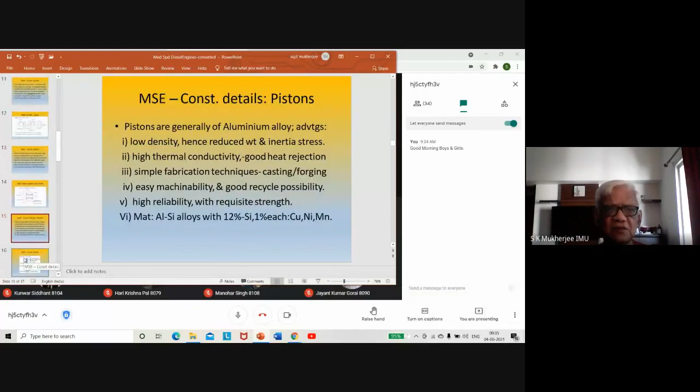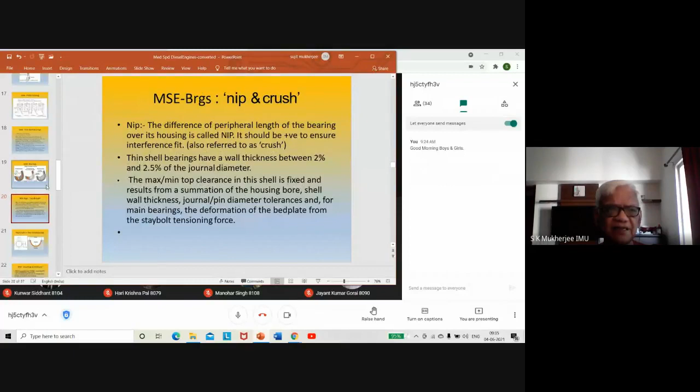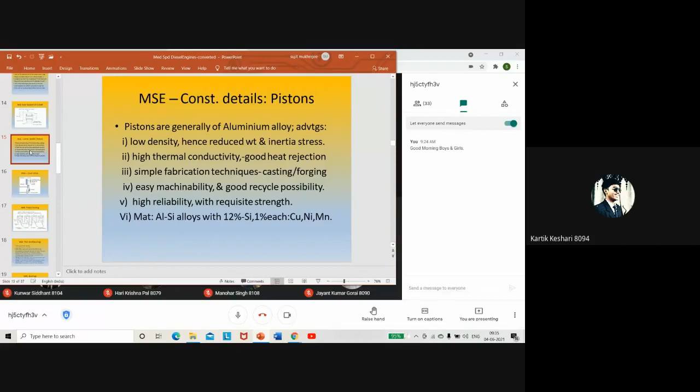The medium speed engines, which part? Advantages were done last, sir. Okay, advantages. And in systems, there's advantages, constructional details. Thin shell bearings - have we done that? No sir. Pistons, we have done pistons, so it was much before. Advantages, yes, here you are. You're doing advantages. Okay, we are going to go pretty fast in this. Okay, desirable features - you have seen there are 9 desirable features, and thereafter we started on medium speed engine advantages.

Somebody has come to class - Ketan Kumar Sinha. This is a bit of a disturbance, 33 only. Indrajit Mitra, okay, no more, we are not admitting anymore. Fellows come late to class and you keep reading, and I keep admitting, and you keep coming later and later in the same sequence. Mrityunjay Das, okay this will be the last, no more.

So we have 34 boys, and this is section C. Paran Abdus, are you there? Kundan Kumar, are you there? Not there, neither of the class in-charges are there. Okay Karthik, you take charge, and I need to know the absentees at the end of the class.

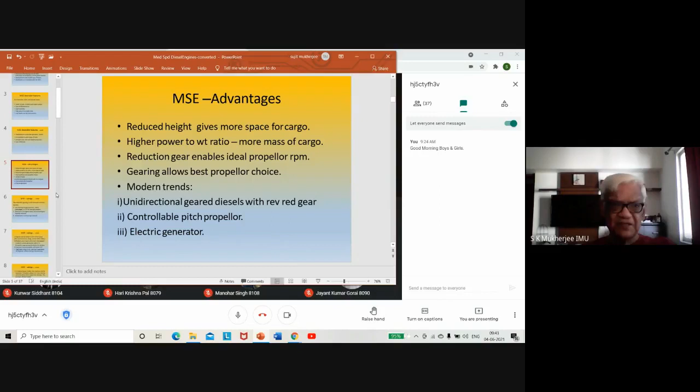So these are really diesel electric ships, and we don't see them much on cargo vessels that we serve on. They will be mainly on passenger ships or naval ships. More common are the geared diesels, with reverse reduction gearing and controllable pitch propeller being most common.

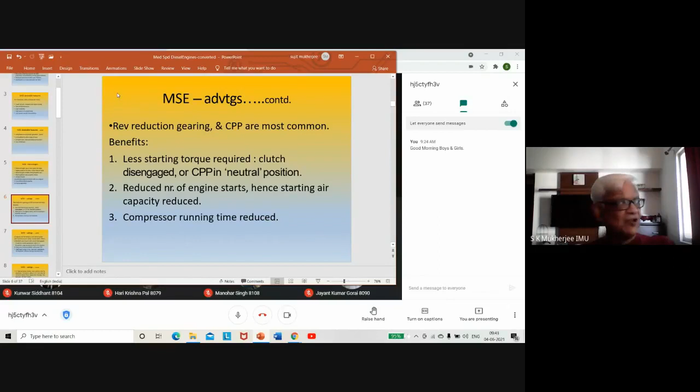Some of them carry reefer cargo. Reefer cargo ships are also very highly stressed ships. Reefer cargo ships and product carriers commonly use controllable pitch propellers.

Okay, what are the benefits of having medium speed engines as your propulsion units? One is less starting torque required, since the clutch is disengaged, or the CPP is in neutral position.

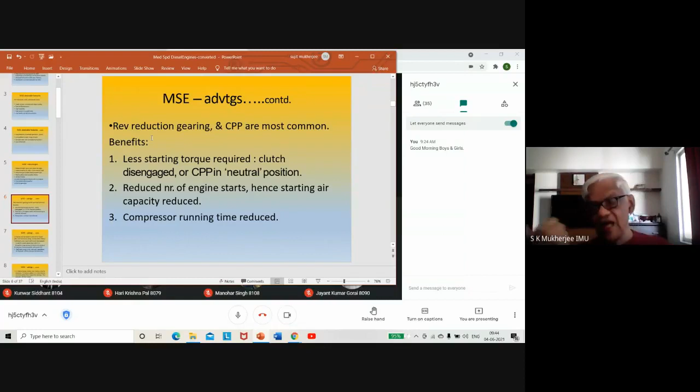Now when you start the engine, let's consider a two-stroke engine that is directly coupled to the propeller. So when you want to start the engine, you have to overcome the resistance of the engine itself, and also the resistance of the propeller. So the quantity and pressure of air required to push the piston down will be much more. Now in the medium speed engine, you have a clutch mechanism, so all you need to do is declutch the propeller and your engine is free. You need very little air to give a little push on the piston, and the engine starts rotating.

It helps to start the engine with a minuscule quantity of air. So you don't need very large air bottles, and you don't need high capacity compressors. So you save a lot of money in that. That is why a medium speed engine has been found to be more advantageous.

Other than this, in the case of a controllable pitch propeller, you can put the propeller in neutral pitch, and then there is no resistance to the engine where the propeller is concerned. So it is very easy to start that engine.

In fact, I will tell you an experience. We had a two-stroke large bore engine, and anytime the rudder was hard on port, we could not start the engine. No matter how much air you give, you cannot. Moment that rudder was put to hard on port, we give air, it will run and then stop. It wouldn't pick up the momentum.

Then we realized on the rudder angle indicator that the rudder is on hard on port. So we used to ring up the bridge and tell them, put the rudder on midship. So they used to put it on midship, and then the engine used to run. Why? Because when the propeller was turning, it was getting a lot of resistance, not being allowed to throw the water beyond the rudder, because the rudder was acting almost like a wall. So the propeller was pushing water against it, and in turn the rudder and propeller were under a lot of resistance.

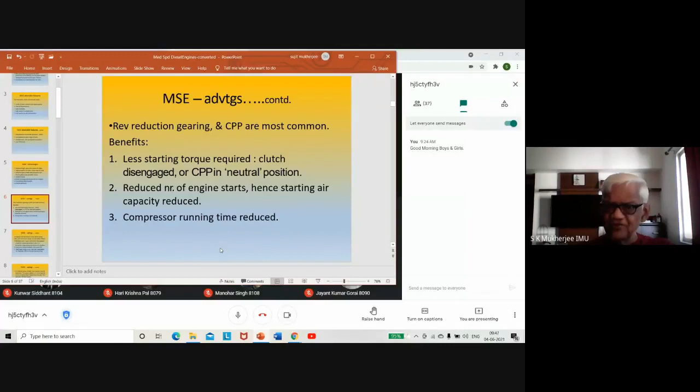The engines can be tested in port at full speed. Once you declutch the engine, you can run the engine at full speed. This is of enormous advantage as trials after overhaul, because after you decarbonize a unit, you have changed, let us say, a piston or piston rings or a bearing, and then you put the parts back, and you're not sure if the engine is going to run satisfactorily or not. And you can't afford to try it out because the engine is directly coupled to the propeller.

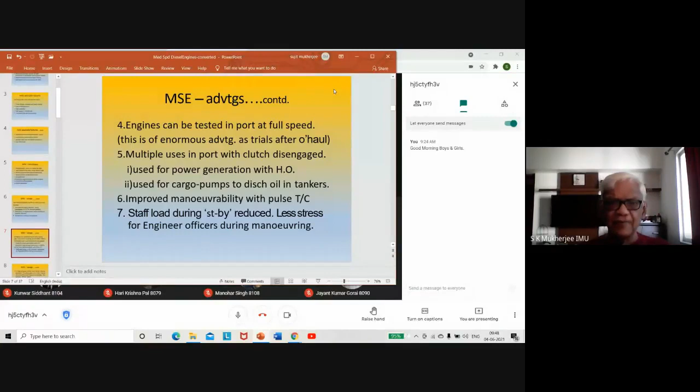If you start the engine and run it, the whole ship will take off and will tear the mooring ropes also. So you cannot try out the engines in the case of a large bore two-stroke engine having direct propeller drive. But in the case of a medium speed engine, you have the option of disengaging the clutch and running the engine at full speed. You can run it for 1 hour, 2 hours, 3 hours, no problem. Then you check around that engine whether everything is satisfactory after your overhaul.

Once it is certified that it is perfectly satisfactory, you can shut it off and relax, because when the ship is required to go out of the harbor, you know fully well that your engine is fully ready, no problems. That is a very big advantage. Otherwise, if you've done everything and then when it's time to depart from a harbor, you start the engine and the liner starts leaking, or the fuel oil pipe starts leaking, or something is making a noise which has not been tightened properly. These problems come up very often after overhauling an engine. So you need to try out the engine, and this is possible only in the case of a medium speed engine which has a clutch arrangement.

I hope you follow the understanding of what I'm saying.

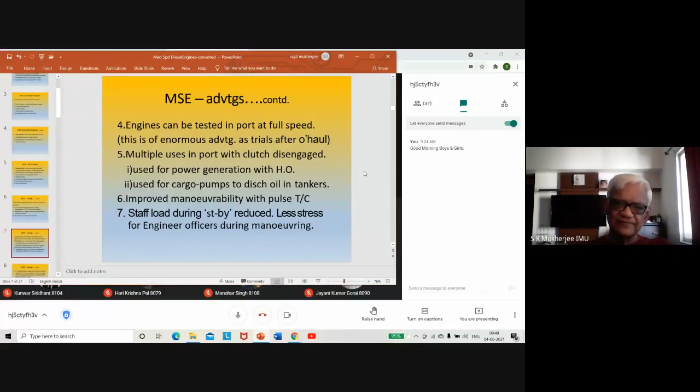Himanish Mukherjee, are you awake now? Still not awake. Himanish Mukherjee, where is he? He's there only on paper.

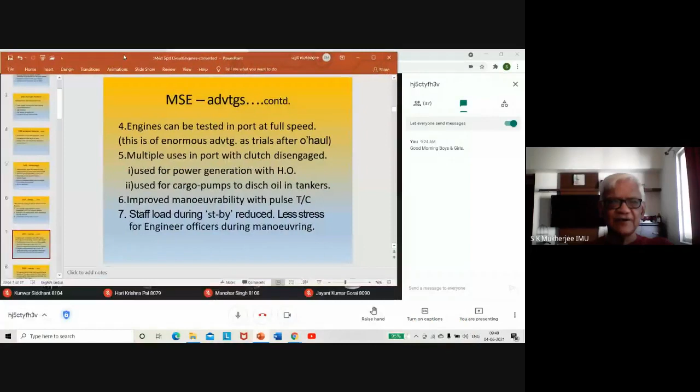Yes sir, what's happened, your microphone is not working. I can't hear you, I can only read the message you're giving. I can hear Karthik, I can hear Manohar Singh, but Himanish Mukherjee has microphone issues. Okay never mind, stay awake, that's the important part.

So you realize how important it is to try out an engine after you've done the overhaul, and this is possible with medium speed engines with the clutch disengaged.

Apart from this, you have multiple uses in port with the clutch disengaged. That means the ship owner has paid a lot of money to buy a main engine. If that is used only for transporting the ship, once it reaches port it sits idle, not giving returns on investment. So this medium speed engine can be used for multiple occasions when the clutch is disengaged, meaning the propeller is not engaged with the engine.

So what uses can it have? It is used for power generation with heavy oil, which is cheaper than diesel oil. So instead of having 3 auxiliary engines burning distillate fuel, you have only 2.

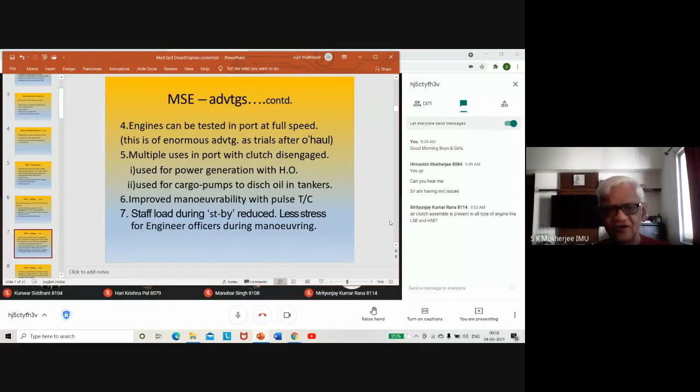Yes, sir. Mrityunjay? Yes, sir. Okay, be very clear - these are the places you will get caught during your interviews with shipping companies. They will ask you, medium speed engine, do you know what is a medium speed engine? How is it used on board the ship? You tell them a medium speed engine will have a clutch if it is used for propulsion, but it will have no clutch if it is used for electricity generation, because you don't have any resistance at the time of starting. You can run it idle, you don't need to put the alternator on load, and then you can check the engine is all right or not. There's no problem. But for the main engine, the clutch will be there, with the ability to disconnect and connect.

For a two-stroke large bore engine, there is no clutch, it is directly driving the propeller. So staff load during standby is reduced - that means you don't need extra engineers when you're using a medium speed engine, because your engine is continuously running. You don't need extra people to look after the compressor, and you don't need extra people to look at other parts of the engine also.

Good that you ask questions, Mrityunjay. If you have any more questions, definitely you must ask. But keep your concepts absolutely clear.

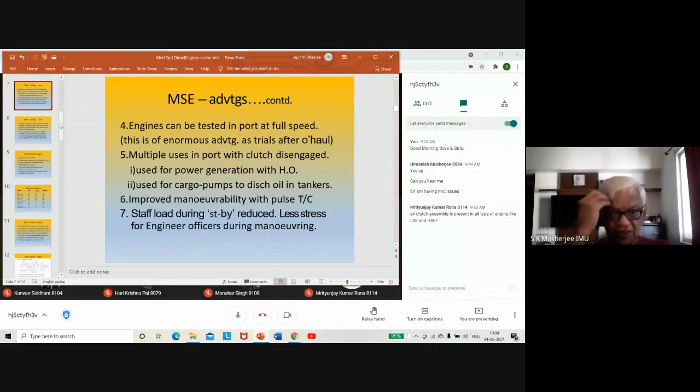Engines being smaller, two engines may be deployed. This gives safety in numbers. One may be serviced while the other keeps the ship moving. This reduces off-hire losses.

Now, all this time we were talking about comparison of engines. A two-stroke engine is a big, tall, huge engine. A medium speed engine can be very small, but give much more power to weight ratio. So if you're going to use a small engine, why not use two engines? Because the space is available.

If you have two engines, the advantage is that if at sea a breakdown takes place which you are unable to repair, you still have a second engine which can keep the ship moving and bring it to shore, albeit at reduced speed, but it will not be stranded out at sea. If you have a single engine and something breaks very severely, which the ship's engineers cannot repair, that ship has to be towed. And if it has to be towed from the middle of the Atlantic to shore, you might as well sell the ship.

The cost of towing the ship will be more than the ship. That is the way it is. The moment you're in trouble, there are people who are out to extract the benefit out of you. First, they will squeeze you. They will want their pound of flesh. This is the case in all parts of the world. So do not be in trouble on board the ship. If you're in trouble, people will help you, but at a very, very high cost.

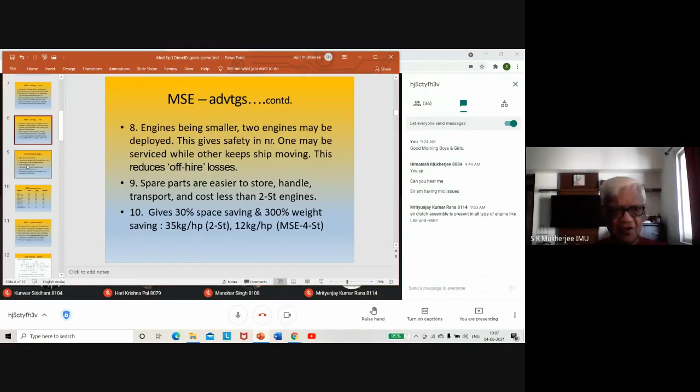You have to take the good and the bad together. So first one is high lube oil consumption. Lubricating oil is the costliest oil on board the ship, so it is a perennial expenditure for the ship owner, an increased perennial expense. So his bottom line margin will decrease gradually.

What is the consumption? Usually 1.2 grams per brake horsepower per hour in the case of your four-stroke engine, as against 0.7 grams per brake horsepower per hour in two-stroke engines. The more modern two-stroke engines will have 0.5 grams per brake horsepower per hour, less than half of what a four-stroke engine consumes.

Why is the lube oil consumption so high? Well, one thing is, after a stipulated running period, the oil in the medium speed or four-stroke engine has to be changed, there's no choice. Why? Because the crankcase space is open to the piston blow-past possibility, so the oil is bound to get contaminated over a period of time.

In the case of a two-stroke engine, you have a diaphragm and a piston rod stuffing box. This prevents any blow-past reaching your crankcase, so the oil is very well protected and it remains very clean.

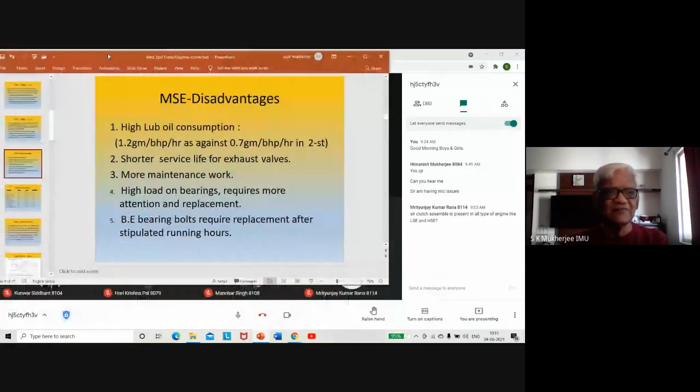Yes, sir. Okay, good. Who else is there in the class? I only keep calling Karthik. Okay, Manohar Singh, Hari Krishna Pal. But most of the guys are sleeping. If I call, there is no response. That's the very sad part. Okay, I'll call any one of you just after this.

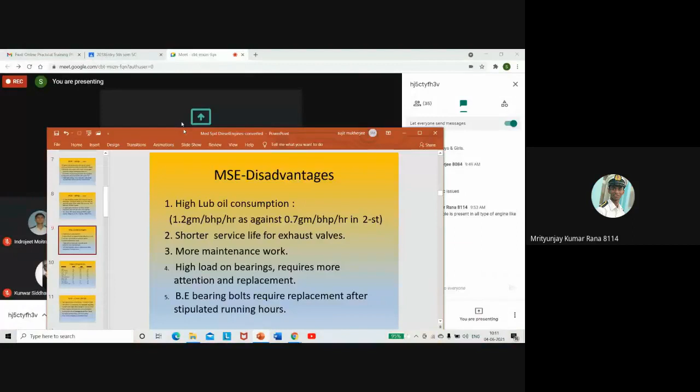Next question. Hello, sir. Yeah, what is it? Sir, in case of two-stroke engine, the purifier is not removing the acidity of the oil. In case of two-stroke engine, it's rankling.

The sound is rankling. Let me reduce the volume. I can hear it is very loud, but it is rankling in my ears. Oh my God! Where is the sound? Just a minute, please. Oh, it is very high. Okay. Yeah, Mrityunjay, repeat your question once more, please.

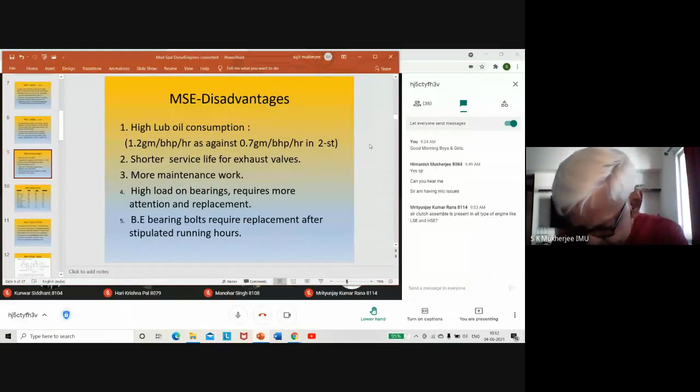Sir, in case of purifier of a main engine, it is not removing the acidic part of the oil.

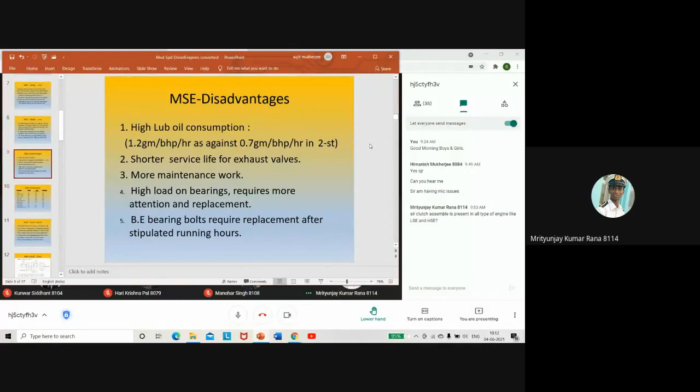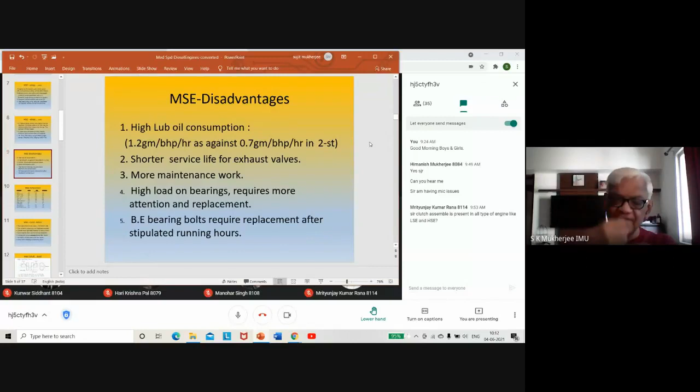Where is the acidic part coming from in the crankcase oil of a two-stroke engine? There is no blow-by coming into the crankcase. You have a diaphragm, and that diaphragm and the stuffing box prevent any blow-by gases. The blow-by gases are the ones that have the sulfur dioxide. That sulfur dioxide gas is not allowed to come into the crankcase. So where is the acid? There is no acid coming in.

Yes, sorry sir. Okay, that is good. Never mind, get your ideas clear. Good that you asked and got it cleared.

In the four-stroke engine, the blow-by goes directly into the crankcase, so the oil gets contaminated not only with combustion debris. Combustion debris means ash, oxide, catfines, oxides of catfine, carbon, sulfur dioxide, sulfur trioxide, acids - everything is blown into the crankcase. So four-stroke engine oil has to be changed after a stipulated running time.

Same with your motorbikes - you must be riding motorbikes and all these. Most bikes are now four-stroke. Previously we had two-stroke and four-stroke, so the two-stroke bikes were comfortable - they never used to change the oil. But the four-stroke bikes, after 1500 kilometers of running, you have to drain that oil, put fresh oil, and move on. That is why oil consumption in four-stroke engines is definitely much more.

Now the question to you, Mrityunjay: how is the cylinder lubricated in your motorbikes, both two-stroke and four-stroke? Think it out and keep it with yourself, and we will proceed with the class.

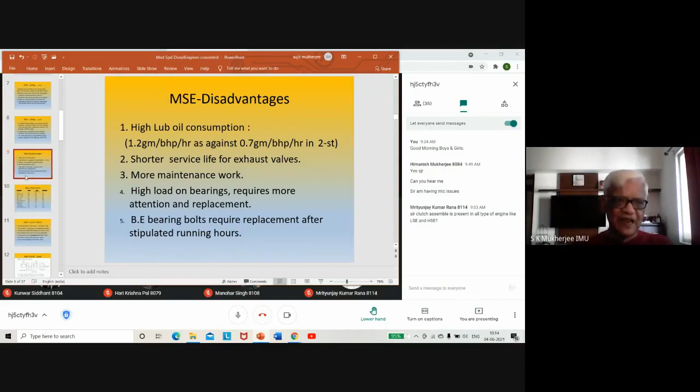Now here I have three different engines, and they are each comparable to each other. I would like you to make a choice which one you would like to install as a medium speed engine for your shipboard. Suppose I give you a ship, a reefer ship, carrying bananas from Kerala to Kolkata - a 5 day trip, not a very big reefer ship, medium sized. Think which particular engine you would require or choose, and what features you would be demanding from such an engine.

So do assignments of similar nature for your own benefit. If you were a ship owner, think like that - between the three engines, which one will I take, and what all facilities and features it must have to make sure your reefer cargo reaches its destination without any fault. You have to start thinking on those lines - you cannot afford to think as an engine cadet all the time.

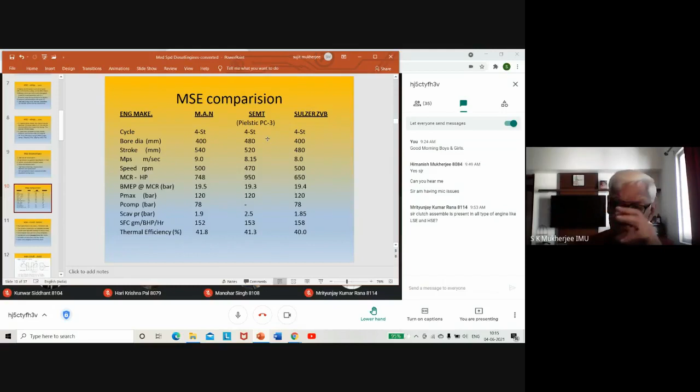Okay, let's go through this one. There are three engines - one is MAN, one is SEMT Pielstick. Pielstick is also a very good engine. It is originally German, but that German company shifted to France during the war and started manufacturing engines in France. SEMT has a certain long name, and the engines they manufacture are Pielstick PC3, PC2, PC1 - that is one company. They are comparable to Sulzer and MAN.

Now here Sulzer has given its medium speed engine, MAN has given its medium speed engine, so you choose between the three which engine will be to your maximum benefit, and accordingly. All the parameters are given, including mean piston speed, compression pressure, specific fuel consumption, thermal efficiency, all of it. This is an indication of how difficult it is for a ship owner to pick and choose a particular engine.

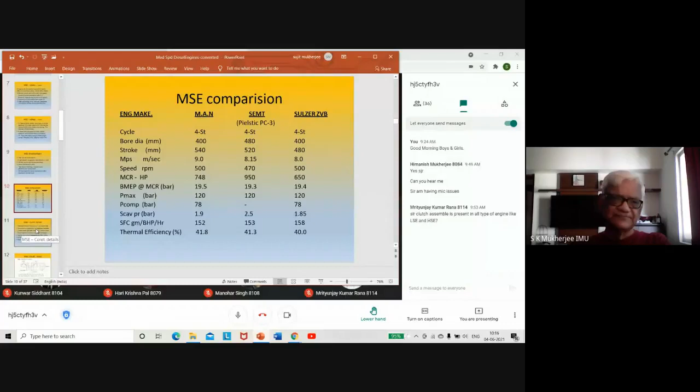Now, let us go through the constructional details of an engine. The engine block is one piece, a completely cast unit, one block. And on that block, all the fittings are put on.

The crankshaft is underslung, which means there is no bed plate required. On the underside of the block, you have keeps similar to your bottom end bearing lower keep. That keep is fitted against the underside of the engine, and the whole crankshaft is hung. Hung means underslung, and when the load comes, it comes on those keeps, and it is capable of taking the load, and it does not have any bed plate.

So what about the sump? Now the sump is basically a mild steel plate which is bent and shaped in the form of a sump, and it is welded onto the block. So it forms your sump. Of course, there will be a drain passage also, and it will have the required pump suction run by the engine, etc.

So these modern engines are monoblock engines. Apart from this, the crankshaft is made rigid with overlap to reduce stress. A crankshaft, if it is a straight shaft, is very rigid. But if it is made with crank throws, it becomes weaker where torsion or bending is concerned.

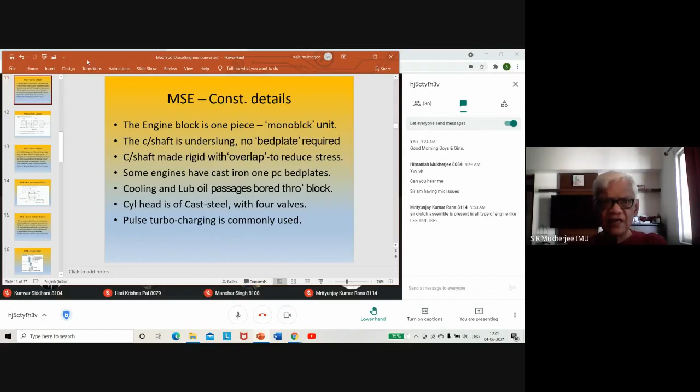Cylinder head is cast steel with four valves. Now, four valves, that means how many inlet, how many outlet? There will be two inlet and two outlet valves. Now, Indrojeet Moitra, I have a question for you. Why will an engine have four valves when two valves are quite satisfactory, one inlet valve and one outlet valve? Why will you have four valves, two inlet and two exhaust?

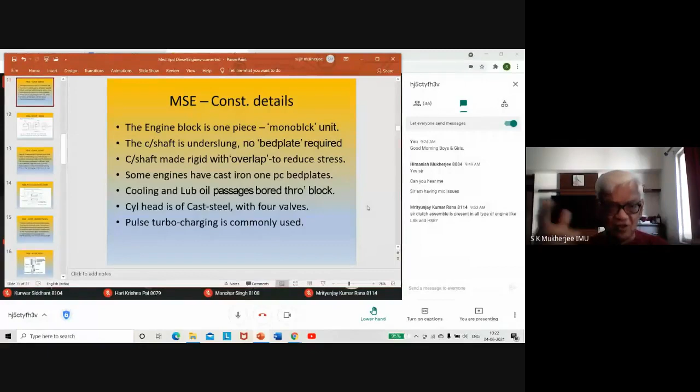Moitra... Yes, sir. Why? Answer my question.

See, you're not paying attention. It's quite evident you're not paying attention. So what we'll do, we'll skip. Manohar Singh. Yes, sir, why will we have four valves instead of two valves? Give your own ideas, don't worry.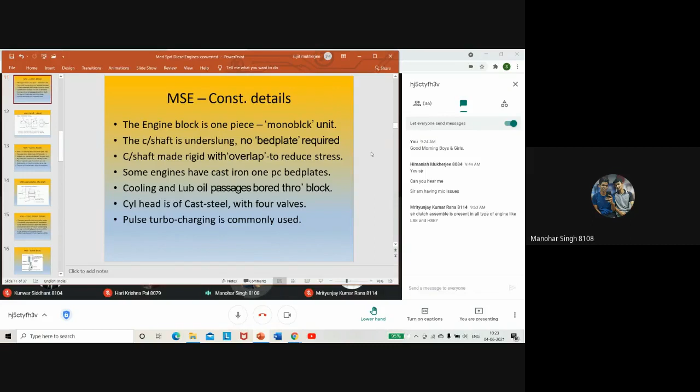Sir, if we use four valves instead of two valves, we can reduce the weight and also increase the efficiency because air intake will be more, breathing will be more for the engine. Absolutely right, that's a very good answer. The breathing characteristics of the engine will improve if you have a larger opening for gas transmission. That means air comes in quickly, fills up enough, and goes out quickly too. So how well you breathe will decide how well you can run a 100 meters dash, and how poorly you breathe will also indicate how poorly you run the dash. Correct? That's right, Manohar. Okay, let's move on.

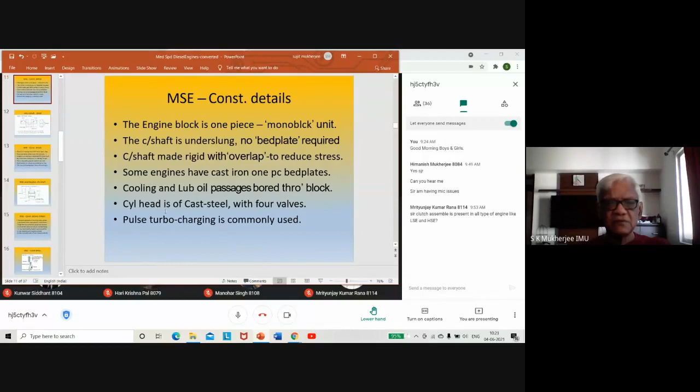Where were we? Cylinder head of cast steel with four valves. Pulse turbocharging is commonly used. Yes, medium speed engines will always have pulse turbocharging. I told you why - they gave immediate acceleration.

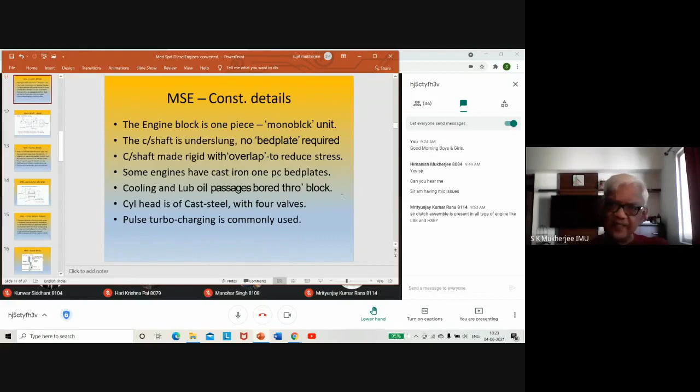Now let's have a look at the crankshaft which we were talking about. Here is the crankshaft of a medium speed engine. In a two-stroke engine, the crank webs will be much longer and the crank pins will be down here somewhere. So the crank throw means the distance from the center point of the journal to the center point of the crank pin. If this distance is large, it means the crank throw is large. Now, in the case of a medium speed engine, the crank throw is made small intentionally to ensure that the crankshaft has some rigidity.

Now if you look at it from the side, you will see the cross section of the crank pin and the cross section of the main journal - sorry, this is the crank pin and this is the main journal. They have a certain overlap. This overlap provides some amount of rigidity to the crankshaft. It is much stronger. There will be no crankweb deflections so easily. So it will stay in a much better shape and have more reliability.

The figure shows drilled bores for lube oil to the connecting rod. The lubricating oil which is fed to the main bearing - this is where the main bearings come in - it is fed in, and the shaft itself has a drilled passage. This drilled passage goes through the crankshaft and comes out from the crank pin. Similarly, a drilled passage from this bearing comes out from the connecting rod bearing. Once it comes out from here, it not only lubricates the bottom end bearing, it allows the oil to go up to the connecting rod and lubricate the gudgeon pin. That gudgeon pin bronze bush also needs lubrication, so it is lubricated there.

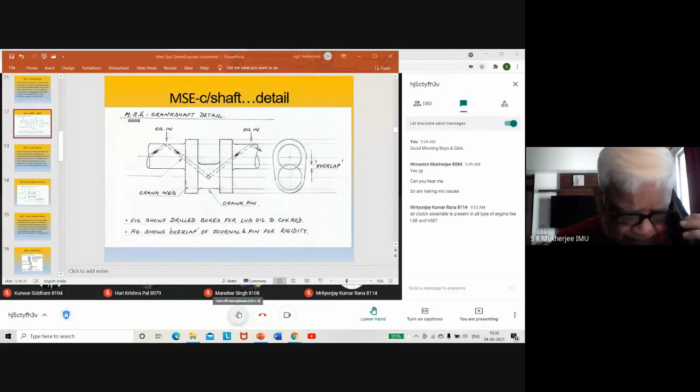Yes, absolutely. Absolutely. Yes, definitely. Okay, okay. Theek hai. Yes, absolutely.

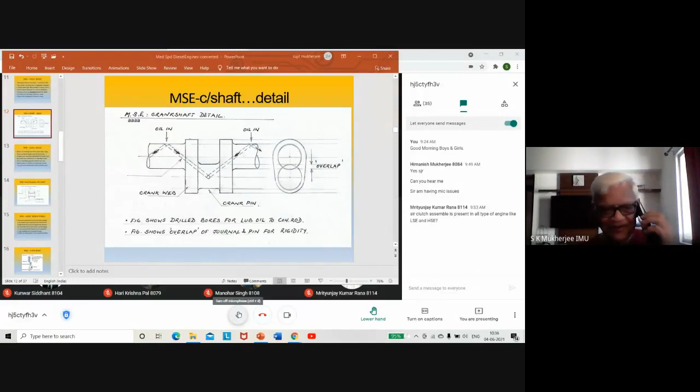See guys, that was from Mr. Abir J from NYK Ship Management, and they are having issues with one boy, Abhay Kumar. They need his tar book, which has to be got from our office and sent to Mumbai by courier. But our office is closed, so nobody is coming to the office until after the 15th, and on the 17th he's supposed to join ship. So the decision is that he can join ship without the tar book, and they'll have to courier it to Singapore, wherever the ship is going. These issues have come up, and we hope there will be no more lockdown after the 15th so we can go to office to perform these actions. I have written to the head of office, but nobody can do anything if it's a lockdown. First priority is fulfilling requirements of the lockdown. Everybody is in trouble, what to do?

Okay, let's get back to our subject. So this is your crankshaft. Sir, how is the lube oil supplied to the bore of the rotating crankshaft?

Good question. The lubricating oil comes from the sump. The pump takes the oil from the sump and it passes through a common manifold. From this manifold pipe, individual pipes come out from each unit, and these pipes are ultimately fitted on the main bearing cap, so the main bearing gets the oil first.

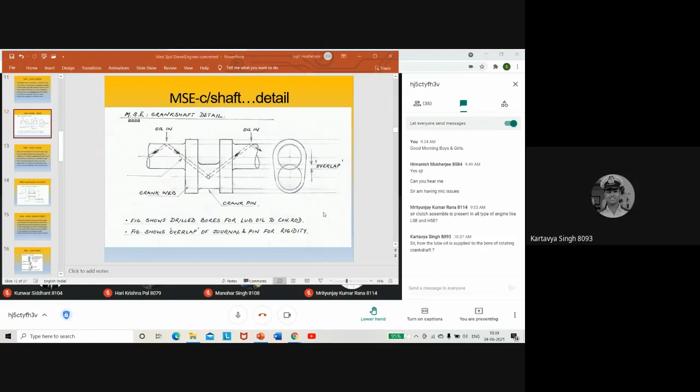Okay. So Kartavya Singh - yes sir - it comes from the main manifold, and that manifold is pumped with oil by the engine-driven pump in the case of a medium-speed engine. That oil comes from the manifold in separate pipes to each of the main bearing units. This is one unit, this is another unit, similarly every unit will have a main bearing.

The crankshaft has several main bearings, so the oil comes to the main bearing, goes into it, and lubricates it. The excess oil further moves through the bore of the journal - this is the bore, the hole in the journal - allowing oil to pass through and come to the crank pin bearing. From here it lubricates the crank pin bearing and further moves up through the connecting rod to the gudgeon pin bearing.

Have you understood? Yes, sir. Okay, let's move on. This is the one, next is this. Okay, now.

Further, we are going to discuss the bearings of the crankshaft, specifically the modern bearings. I am leaving out the old casting bearings that were used earlier - they are of no consequence now and you are unlikely to see them on board.

So the thin shell bearing is the more common type used for your main bearing. It is used for your bottom end bearing, and also for your crosshead bearings in two-stroke engines. But in a four-stroke medium-speed engine, the gudgeon pin bearing is still a bush bearing.

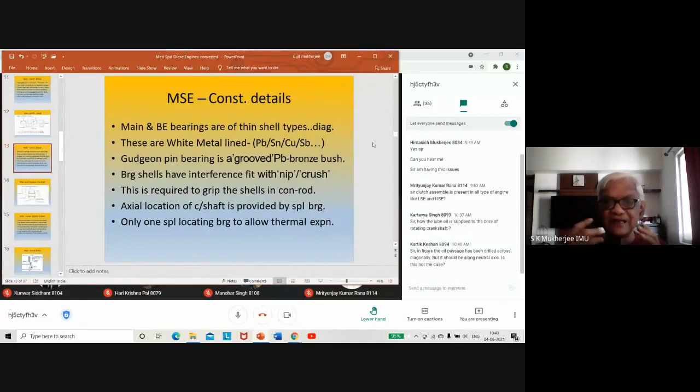In my earlier classes, I had told you that the gudgeon pin has a bronze bush. Well, this bronze bush is not a pure bronze bush, it has some amount of lead in it. Lead provides some softness within the metal and helps for better friction reduction. That is why the bush used for the gudgeon pin is a lead bronze bush. This bush also has grooves on the internal surface, which help retain some of the oil when the gudgeon pin or the bush is moving.

Now sir, in the figure, the oil passage has been drilled diagonally, but it should be along the neutral axis — is this not the case? Kartik, you're looking at this view, the frontal view.

Now if you look at the end view, let's go back to that. The view is coming from the main bearing up to the center part. From here it will go at a particular angle which is at the neutral axis. This is the crank pin. I've shown you here because I cannot show it any other way. From the center portion of the shaft, it has to emerge to the surface, and it will emerge at that particular angle where it is on the neutral axis.

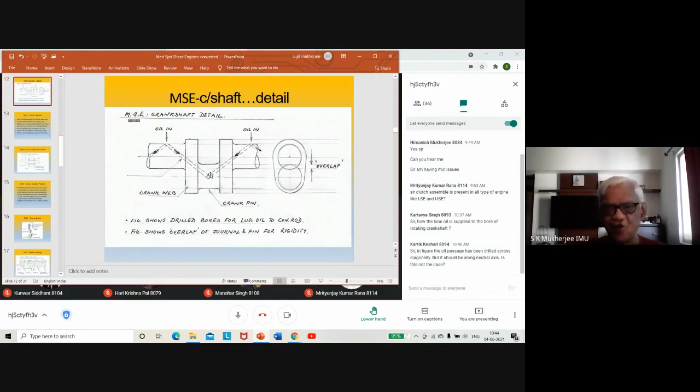You're looking at it from one side, and I have to show you this hole. Right now the hole should be right over here. But if you turn this and look, say, at this point — where is the neutral axis? It will be right on this surface. When you put it on this side, it will be here. It's almost actually at neutral axis right now because it is shown at BDC.

So when the pressure and load are there, the tensile stress will be at the bottom and the compressive stress will be on the top, so the neutral axis will be around here only. What we are seeing is almost correct, maybe a few degrees off here and there — it may be slightly at an angle, but it will definitely be on this side.

So imagine this crankshaft at this angle. When the force comes here, the tension will be at the bottom and the compression on the top, so the neutral axis will be exactly at this point if you see it at the bottom when rotated in this direction. That is why I have not shown the dotted line there — the dotted line is here. This is how it is seen as what you're seeing. Yes, you're right, it should be at the neutral axis, otherwise your crank pin will start shearing off.

Okay, so let's move on. Where were we? Here.

The bearing shells have an interference fit with nip and crush. In other words, the shell diameters are such that the overall circumference is a little more than the keep of the connecting rod and the bottom keep. So when you put the two together with the shell, there will be a gap on the sides. This gap is removed by tightening the bottom end bearing bolts and closing that gap.

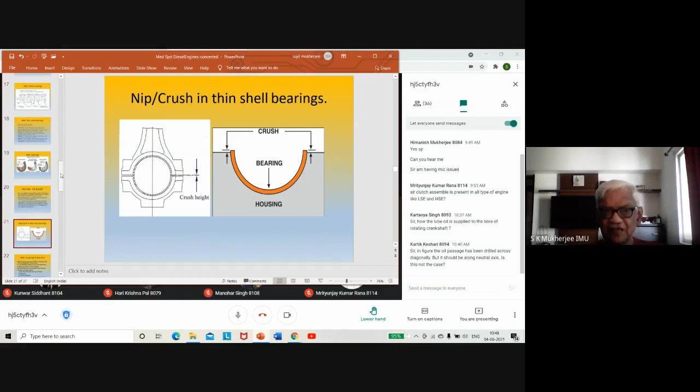If the shell rotates, what damage can take place? It will not allow the lube oil to pass through and reach the gudgeon pin. The hole in the shell is at a fixed point, and that hole must match with the hole in the connecting rod. If the two shift, or if the shell shifts away, it will become a blind hole and will not allow the oil to pass through. So that is why it is very crucial to have the shell tightly fitted inside the bearing keep.

Bearing shells have an interference fit with nip or crush, both meaning the same thing. This is required to grip the shells to the connecting rod.

Axial location of the crankshaft is provided by a special bearing. That means the whole crankshaft is capable of moving in the axial direction marginally, so it has to be located or fixed in place. In the case of a two-stroke engine, the thrust bearing, which is fitted to the propeller shaft connected to the crankshaft, locks the entire shafting system in one place.

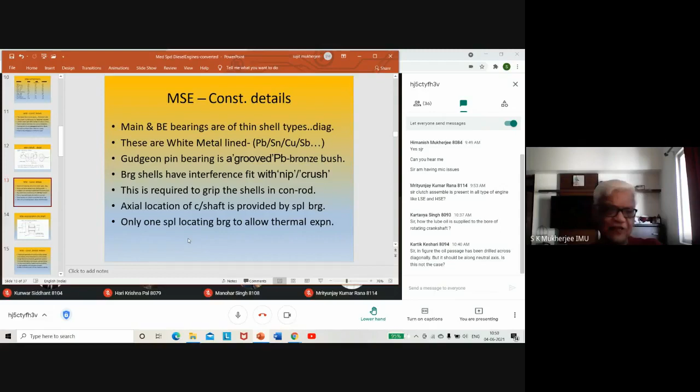In the case of a medium speed engine, there is no thrust bearing acting on the crankshaft, so the crankshaft must be located in a particular position. This is done by a special bearing, located on the last main bearing just before the shaft moves out to the flywheel.

Only one special locating bearing is allowed, to allow for thermal expansion. The whole crankshaft can't be gripped in two places because the shaft has to expand and contract, so you hold it in one place and allow the shaft to expand as per temperature changes.

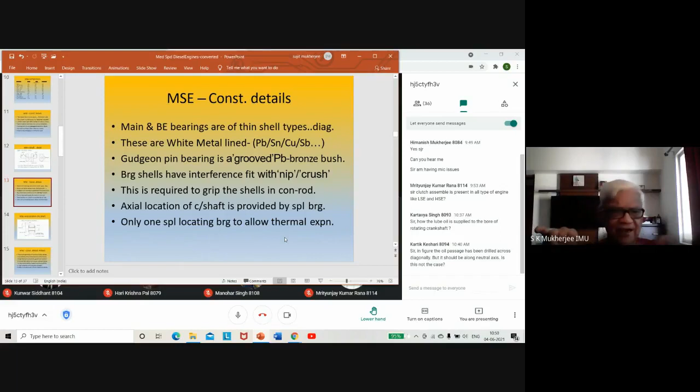So here is the diagram to show you the locating bearing of the crankshaft. This is the last transverse girder inside the bed plate, or the last main bearing supporting the crankshaft. It has a special shell with a surface to take the axial force of the crankshaft.

This crankshaft has a web and a crank pin. On the web, there is a protruding part which makes contact with the white metal part of the thin shell bearing on one side. On the other side, you have a collar on the shaft, and that collar takes support on that bearing. So now the crankshaft cannot move axially either to the left or to the right; it is located only in one place in the axial direction.

The bearing has a coating of white metal so the surface can comfortably run on it, and the load is very little. There is hardly any load; it is only keeping the crankshaft in position and does not allow it to float away.

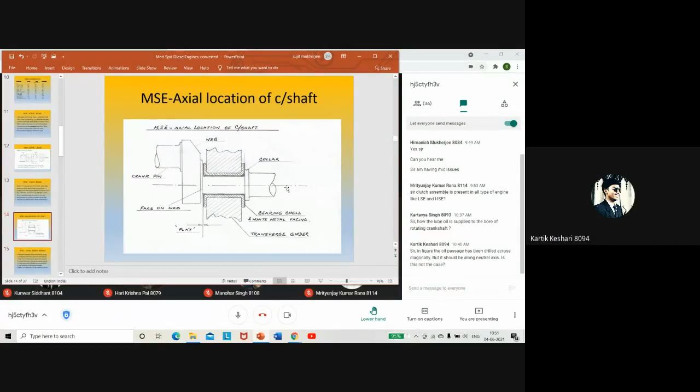Kartik, have you understood this diagram? Yes, sir, understood. Okay, good.

Next, we go to the pistons. The pistons in medium speed engines are generally of aluminium alloy. What is the advantage? Aluminium alloy is not aluminium, it is a mixture with other metals also. Keep that in mind.

Low density, hence reduced weight and inertia stress. If the mass of the piston is less, the acceleration and deceleration forces that arise with piston movement are also reduced, so the bearings are subject to lesser stress, which arises because of the inertia from a bigger piston mass.

In a two-stroke engine, the inertia forces are not so high because the engine speed is much less. Mass into acceleration - the piston is moving fast, it has to stop at TDC and BDC, so it has to accelerate and decelerate. This causes enormous forces on the bearings. It is not only the gas forces acting on the bearing, the accelerating and decelerating forces are also very high.

Apart from this, aluminum alloy pistons also give high thermal conductivity. Aluminum is definitely a better conductor than steel, so the heat that accumulates in the piston is also quickly dissipated. So there is no thermal stress of large scale involved with the piston.

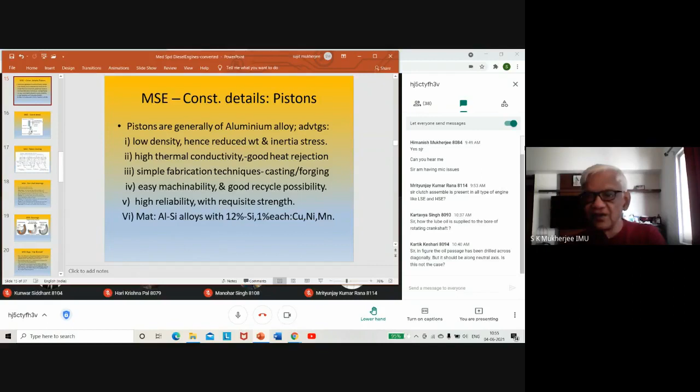Okay, any more questions? So this is the bottommost part.

Okay, so let's see how many are paying attention. Madhav Kumar Jha, are you listening? Yes sir. Okay, what are the constituents of aluminium alloy? Just now I told you - see, you're not paying attention. It is 12% silicon, 1% nickel, 1% copper, and 1% manganese, 85% is pure aluminium. You're not paying attention, Madhav. There seems to be only 2 or 3 boys paying attention. All right, ultimately, it is your goose - you cook it, you have to eat it. I can put in my best effort, but it is for you to ultimately absorb the information and learn the subject.

Okay, we are almost finished our time and we have not yet finished. Anyway, this is your constructional detail of a medium speed engine piston assembly.

You see there are 2 compression rings and 1 scraper ring. This scraper ring is also called oil control ring, because it controls the quantity of oil coming on the cylinder - if there is excessive oil, it has a tendency to scrape off the excess.

The gudgeon pin in this case is called a wrist pin. Actually, wrist pin is a term used for a very small engine. Possibly this is a reasonably small engine. For a little bigger medium speed engine, you will call it a gudgeon pin, which is fitted inside to hold the piston and the connecting rod together.

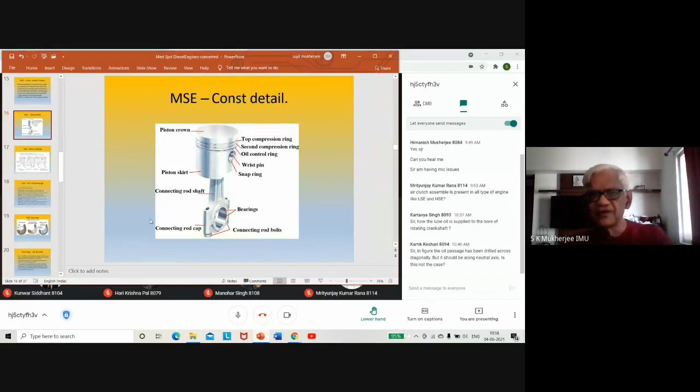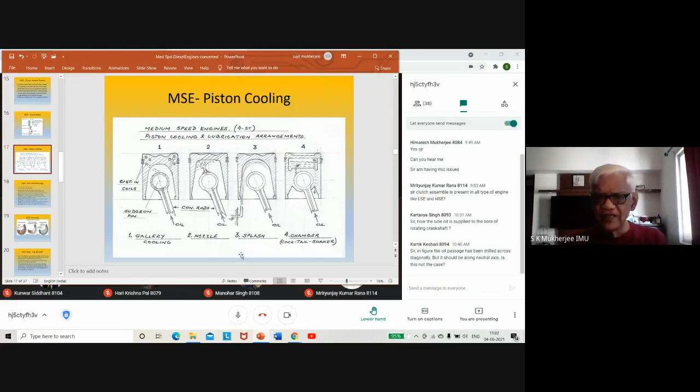So these are the four different means of cooling the piston. Next, what we have is used thin shell bearings. Now, these thin shell bearings can use bimetal or trimetal.

This part is understandable because it's a little extended. Remember, it has a white metal, it has a copper inlay, and it has a steel back. The steel back is what gives it the strength. White metal does not have the strength. So it can have a flash layer.

Flash layer is just 1 micron. The topmost layer, with a thickness of 1 micron, is made of tin and lead and used to protect the bearing from corrosion and dust when not in use.

That means when the engine is new and the bearings are new and it has not been run, this flash comes off when the bearing is in its running-in period. Running-in period is the period during which everything settles down.

Overlay is the second layer, made up of white metal, tin, antimony, and copper, which is the main component in this type of bearing, and its thickness varies depending on the load that the bearing is going to support.

Interlay is the third layer, used as an anti-corrosive layer over the overlay. It is 5 microns thick. It is like a connector, an adhesive.

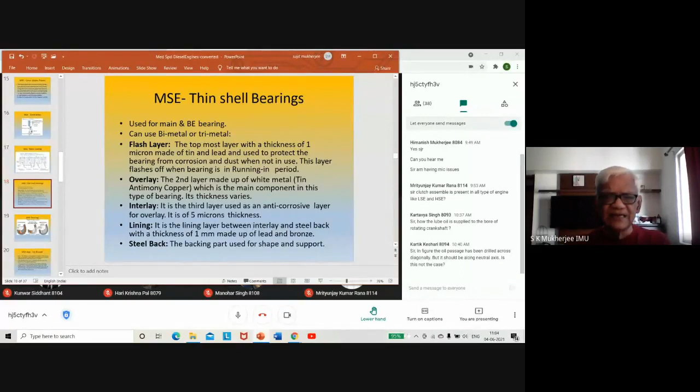The lining is the layer between the interlay and the steel back, with a thickness of 1 millimeter, made up of lead and bronze. And last you have the steel back part, used for shape and support.

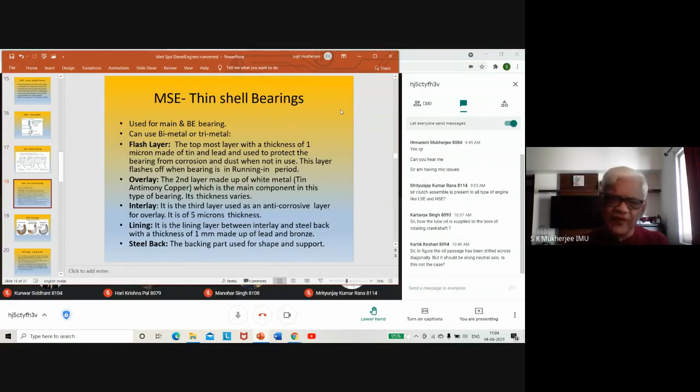There are various types of thin shell bearings, but we will stick to the basics. The basic is a white metal layer, a copper layer, and the steel back. The copper layer has the function of bonding the white metal and the steel, and research has found various means of increasing this bonding strength to the maximum.

Just having white metal on the surface is not enough. That white metal has to stay there. If the white metal gets moved out, then what is the big idea? So you need a very special arrangement where the white metal can bond with the steel and not shift when forces are applied. This seating or bonding between the steel and the white metal, copper is the best. That is called copper alloy.